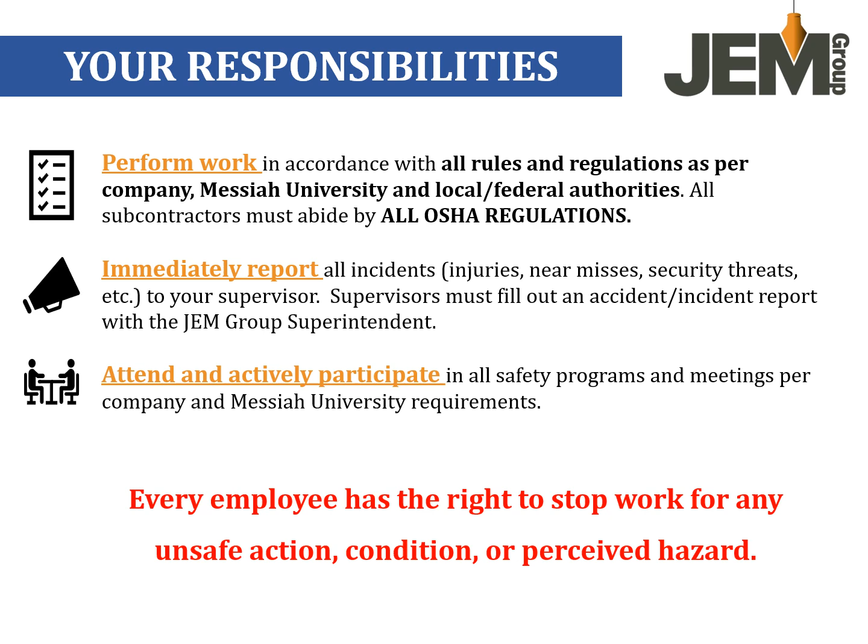We at JEM and Messiah University are committed to an injury-free workplace. You must take responsibility for your personal safety. Be aware of the safety of your fellow employees. Follow all JEM safety and health rules and procedures. Never attempt a task if we have not thoroughly planned around all potential risks, and remain consistent in our belief to work safely and as environmentally compliant as possible.

As a subcontractor or employee of JEM Group, you will be required to participate in a weekly documented toolbox talk. The topics may include safety and job site issues, upcoming work, lessons learned, recent injuries, near misses, any incidents, or any other important issues.

In the event of an incident or accident, your responsibility is as follows, in this order. Number 1, call 911. Number 2, make the area safe if possible. Number 3, treat the victim if you are qualified to do so. Number 4, report the emergency to the JEM superintendent. The JEM superintendent will report the incident to Messiah University Safety and Security. The CPR emergency responder on site for JEM Group is Mark Jordan.

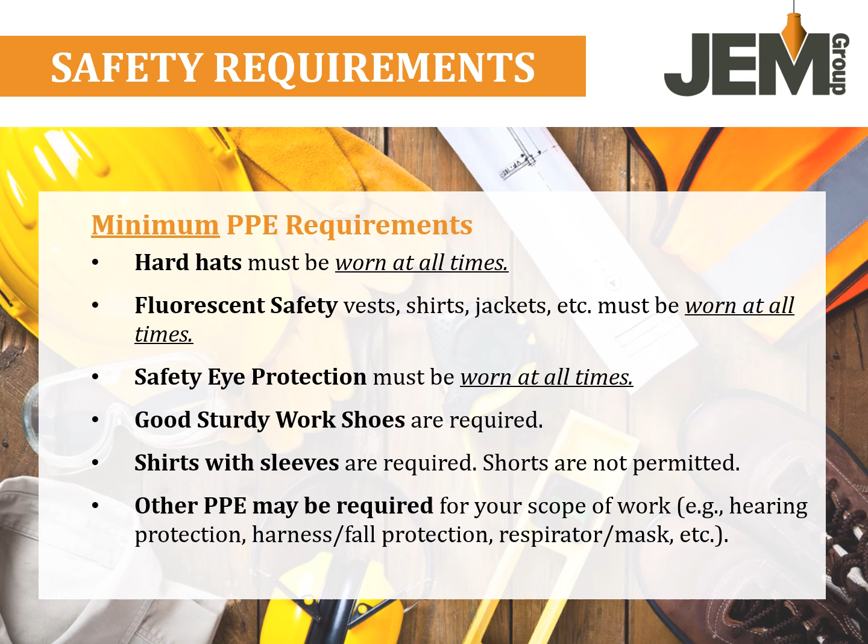Some additional campus-wide Messiah University requirements are as follows. This is a drug-free and tobacco-free campus. Smoking, vaping, and/or the use of tobacco products on Messiah University property is strictly prohibited. Alcohol usage is also prohibited. Inappropriate language, obscene gestures, and profanity are prohibited. This project has a no weapons policy, regardless of whether the person has registered the weapon or is licensed to carry a concealed weapon. This includes pocket knives with blades longer than 3 inches, bows, arrows, rifles, and handguns.

Any form of social media is prohibited. No photos or content can be advertised or posted from an individual, company, or organization regarding this project without the written consent from JEM or Messiah University.

Job site clearances: each person at the work site must have their Act 34 and Act 151 clearance in place. Proof of a clear record must be produced upon JEM or Messiah University request. Subcontractors and employees are required to remain at the location where the work is being performed, i.e. the Naugle building, unless the project specifically requires you to go elsewhere on campus.

The safety requirements for this project are as follows. This project is a 100% hard hat, high vis, and safety glass project. Additional safety PPE, as required, will be mandated. No radios, earbuds, headphones, or sound systems are permitted. While driving on site, please follow the posted speed limits, but do not exceed 15 miles per hour. Daily contractor housekeeping will be enforced. Please also note that this project allows no food or drink in the work area.

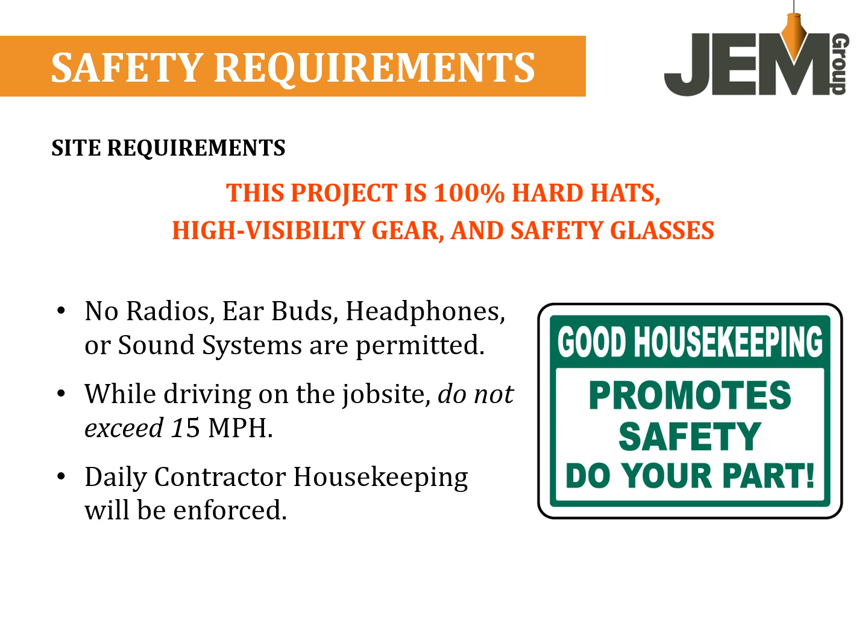Safety violations: a safety violation occurs when an employee violates company policies, procedures, employee safety and/or work practices, or is engaged in unsafe work practices. As a result of a safety violation, the employee will be subject to one of the following disciplinary actions depending upon the frequency and/or severity of the incident: 1. Coaching or additional training. 2. Verbal warning. 3. Written warning. 4. Dismissal from the project until the safety violation is corrected. 5. Dismissal from the project for the duration of the project.

Site logistics: the JEM office will be located inside of the Naugle building, and access to first aid kits, eye wash station, fire extinguisher, safety data sheets, and safety manuals will be in this location.

The emergency evacuation plan for the project is as follows. An audible alarm will be sounded to evacuate the building. An air horn located in the JEM safety cart in the JEM office can be used for this initiation. Three blasts of the air horn would indicate to all employees that they are to evacuate the building and move to the congregation area. In the event that the fire alarm system for the building is operable, it would also be used as an initiator for this occurrence.

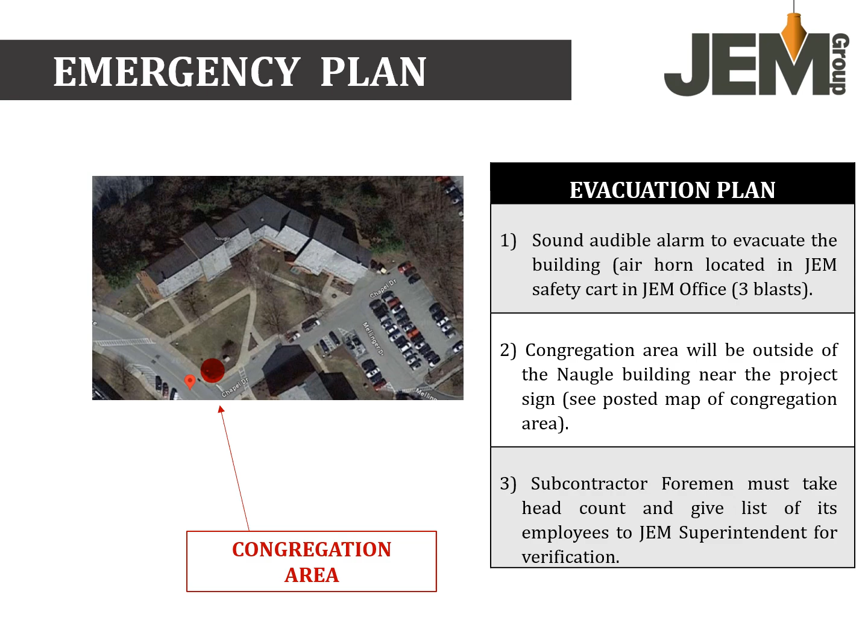Some of the site-specific hazards that we could reasonably foresee on the Messiah Naugle project are as follows: site equipment and rough terrain forklifts on the site, hazardous materials, fall hazards, ladders, energized equipment, hot work, overhead lifts, and cranes.

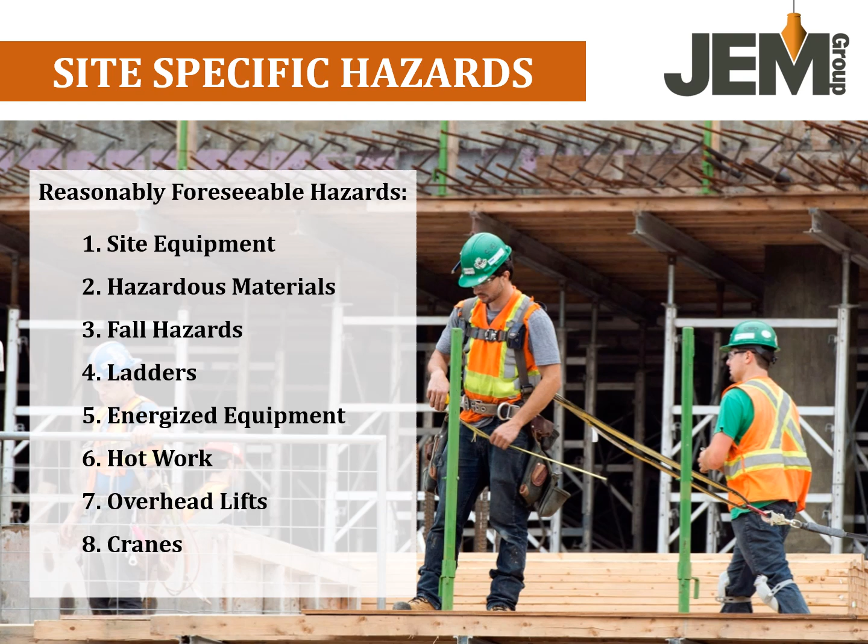Some site-specific hazards that we may foresee on this project as it relates to excavation and site equipment, exterior site equipment, are as follows: backhoes, mini excavator, skid loader, rough terrain forklift, in addition to any other item that may fall under the same category.

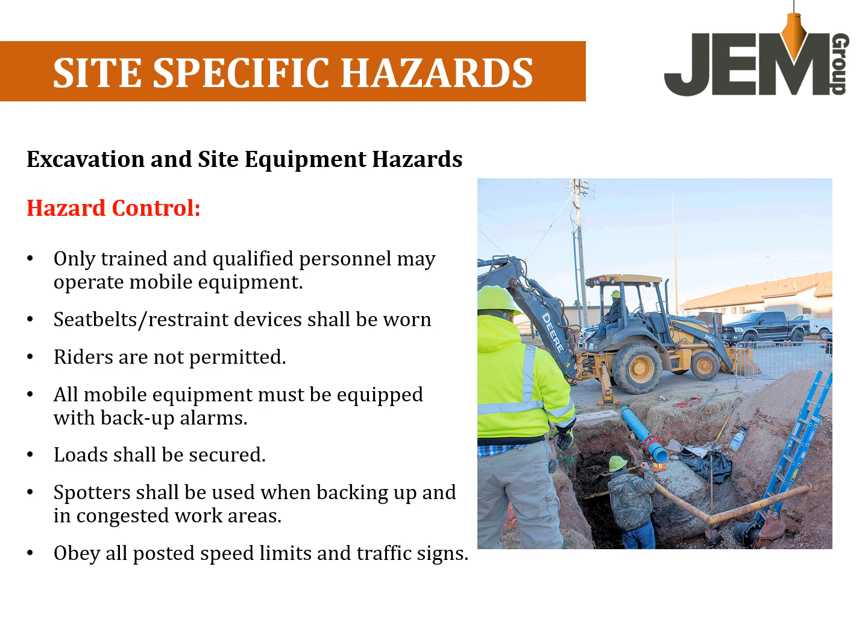Only trained and qualified personnel may operate mobile equipment. Seatbelts and restraint devices shall be worn at all times. Riders are not permitted. All mobile equipment must be equipped with backup alarms. Loads shall be secured. Spotters shall be used when backing up and in congested work areas. Obey all posted speed limits and traffic signs.

For hazardous material communication, safety data sheets are located at the job trailer and are available for review upon request. Manufacturer labels contain basic safe handling information. Read manufacturer labels and keep them legible and in place. Products put into other containers are to be labeled so that others in the area know what it is. Hazard communication is a two-way street.

For fall hazards, 100% fall protection is required above 6 feet when exposed to a fall, including when working from ladders. For hazard control, use guardrails: top rail set at 42 inches, plus or minus 3 inches; mid rail set at 21 inches, plus or minus 3 inches. Top and mid rails must have less than 3 inches of deflection. Rails cannot be used as an anchorage point.

Personal fall arrest systems include a full body harness, double shock absorbing lanyard or retractable, and anchorage point capability of 5,000 pounds.

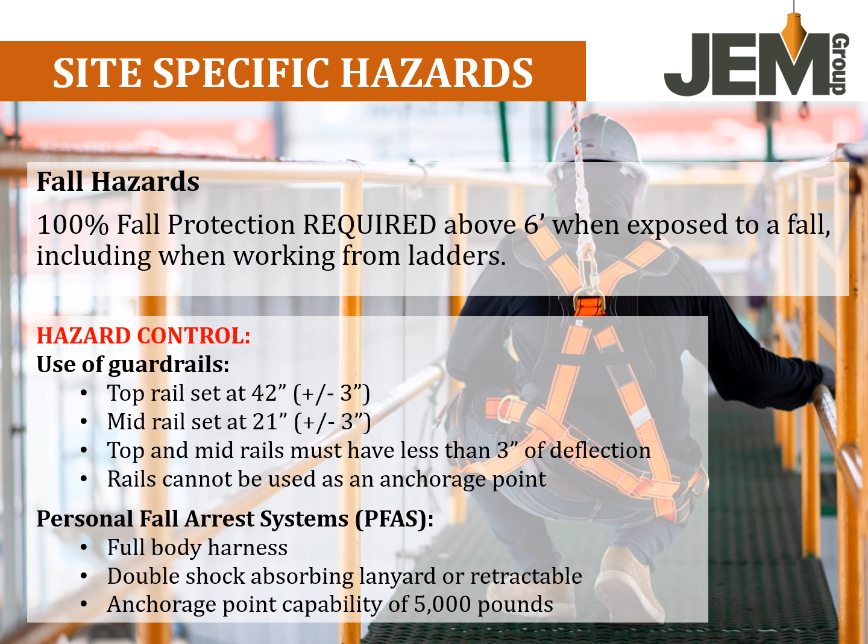For ladder safety, each year there are more than 164,000 emergency room-treated injuries and 300 deaths in the U.S. that are caused by falls from ladders.

For hazard control, ladders shall be inspected daily. If damaged or defective, immediately red tag and remove from service. Extension ladders shall be erected at a 4-to-1 height to base ratio and secured to prevent displacement. Extension ladders are required to extend 3 feet above the landing area.

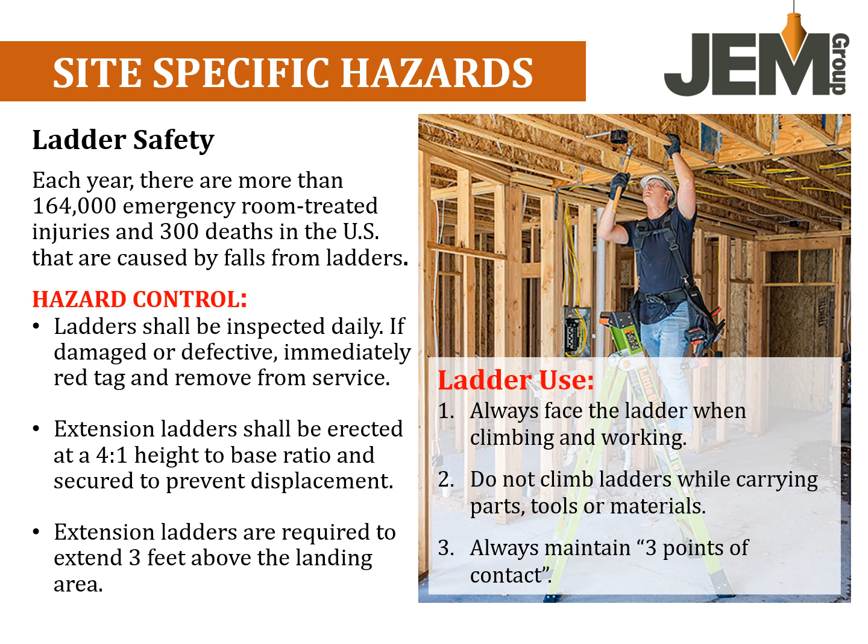Proper ladder use: number 1, always face the ladder when climbing and working. Number 2, do not climb ladders while carrying parts, tools, or materials. Number 3, always maintain 3 points of contact.

For energized cords and equipment, for hazard control, electrical tools, cords, leads, and equipment shall be inspected daily prior to use. If damaged or defective, immediately red tag and remove from service. Only qualified electricians are permitted to repair electrical devices. Ground fault circuit interrupters are required for use on any field tool that plugs into an outlet.

In addition, in part due to the results of a recent arc flash study of the Naugle building, only qualified individuals, Heim Electric or Messiah University staff, are authorized to turn off any breakers, reset any breakers, or turn on any breakers on this project. Notify Mark Jordan if a breaker needs reset, turned on, or turned off.

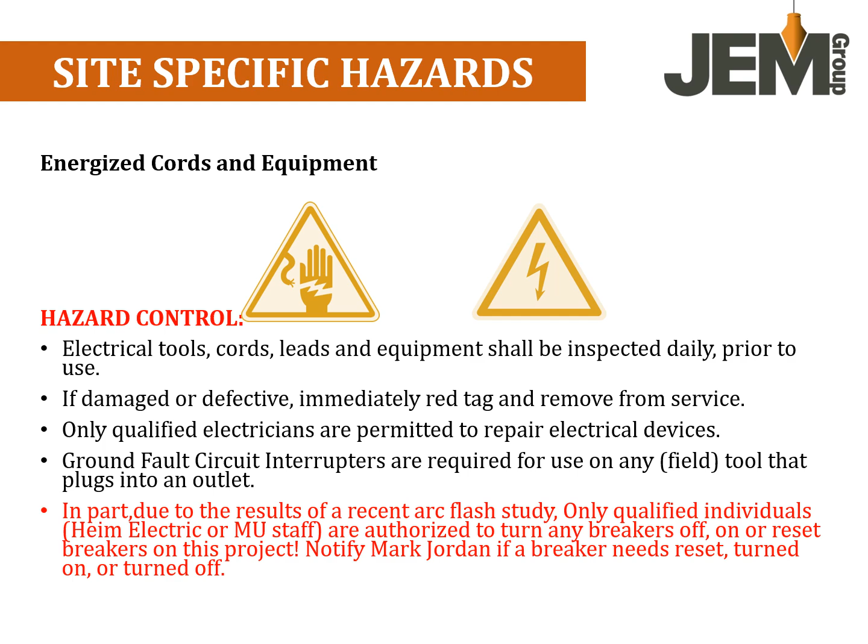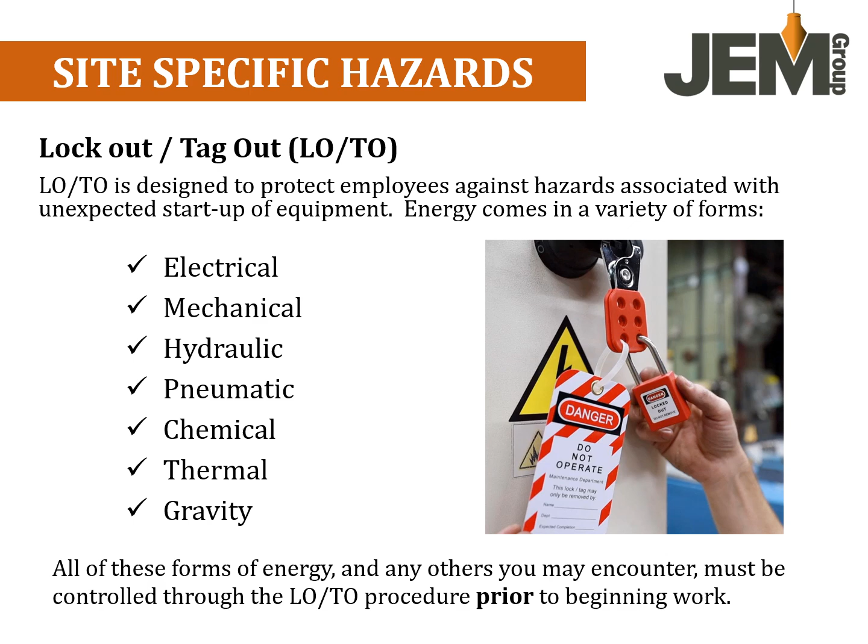For lockout tagout procedures, lockout tagout is designed to protect employees against hazards associated with unexpected startup of equipment. Energy comes in a variety of forms: electrical, mechanical, hydraulic and pneumatic, chemical, thermal, and gravity. All of these forms of energy and others you may encounter must be controlled through the lockout tagout procedure prior to beginning work.

Hot work hazards. Hot work involves any burning, cutting, brazing, soldering, welding, grinding, creating sparks, or use of an open flame or torch. Hot work permits for all projects can be completed via telephone by contacting JEM Superintendent daily to provide the details of the work. Messiah University has a form that the JEM Superintendent can provide in order for this to be accomplished.

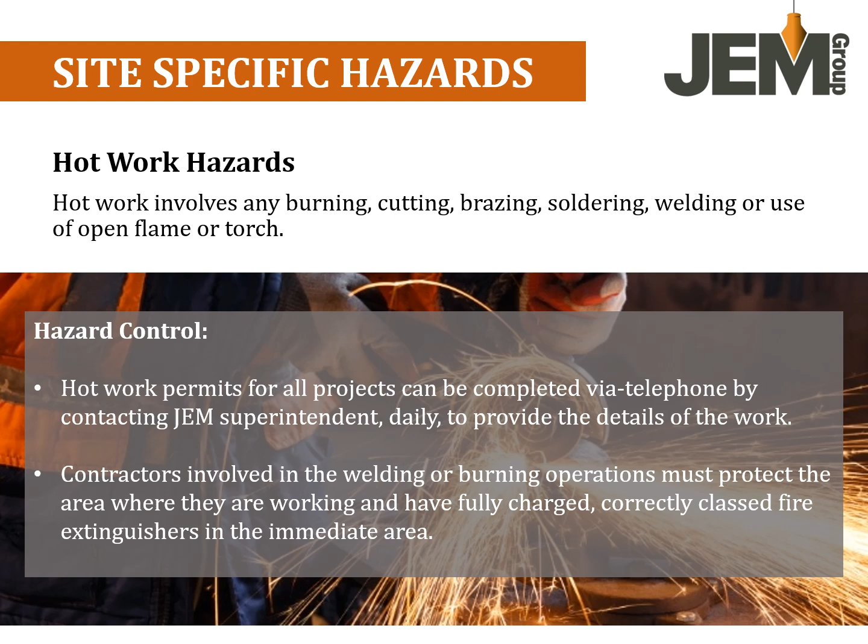Contractors involved in welding or burning operations, in addition to the other hazards listed above, must protect the area where they are working and have fully charged, correctly classed fire extinguishers in the immediate area.

Additionally, related to hot work hazards, fire extinguishers are located at the JEM office and marked locations throughout the job site.

First, inspect the extinguisher. Check the pressure gauge for the proper pressure. Turn the extinguisher upside down. Listen, feel for powder extinguishing media to flow. Pull, aim, squeeze, and sweep when you need to utilize the extinguisher: pull the pin, aim at the base of the fire, squeeze the lever, sweep from side to side.

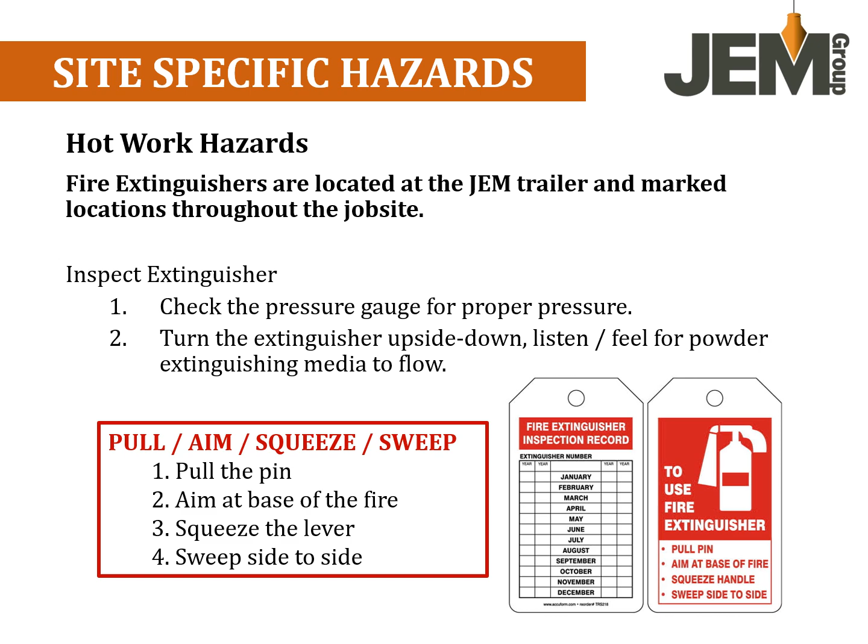Lift hazards. Aerial platform lifts will be utilized on this project. Training is required prior to operating an aerial lift. 100% tie-off is required in lifts. No standing on the top rail, mid rail, or toe board on an aerial platform lift.

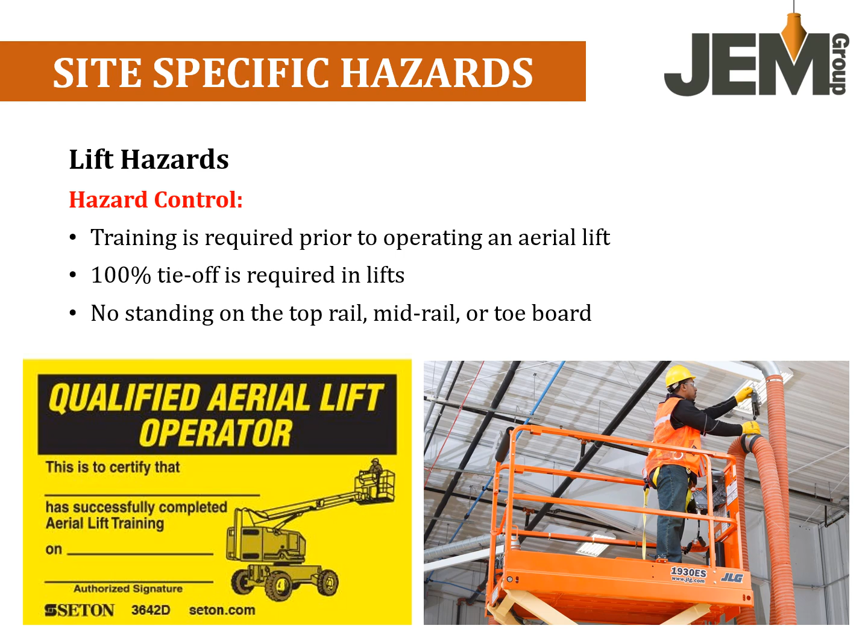Crane hazards. There will be a crane utilized on this project site, primarily to deliver the chiller into the chiller pad. When this occurs, proper planning must take place to limit the area of the pedestrian traffic near the crane. The crane operator must provide evidence of current certifications.

No load may be lifted until the weight is determined. A trained signal person must be designated. Daily inspections must occur for all equipment in use, and a lift plan must be submitted, approved, and strictly followed by the subcontractor.